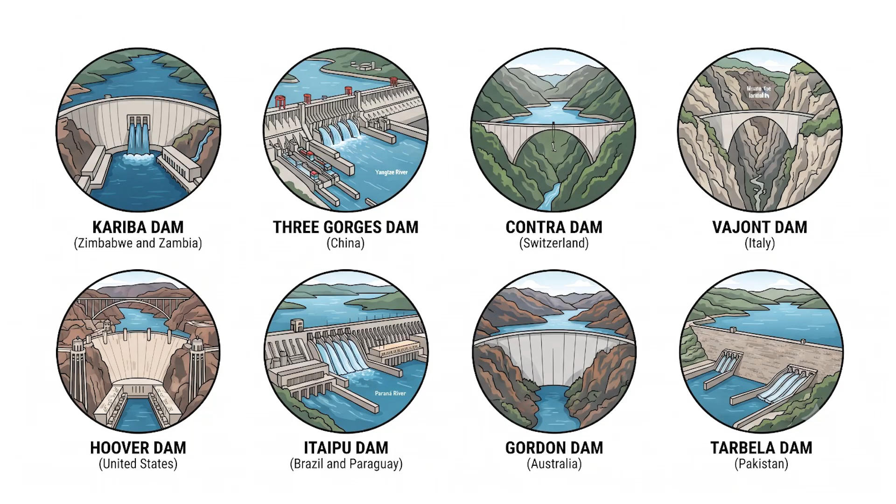The Kariba Dam, Zimbabwe and Zambia. The Kariba Dam sits on the Zambezi River on the border between Zimbabwe and Zambia and created what was, at the time of its completion in 1959, the largest artificial lake by volume anywhere on Earth.

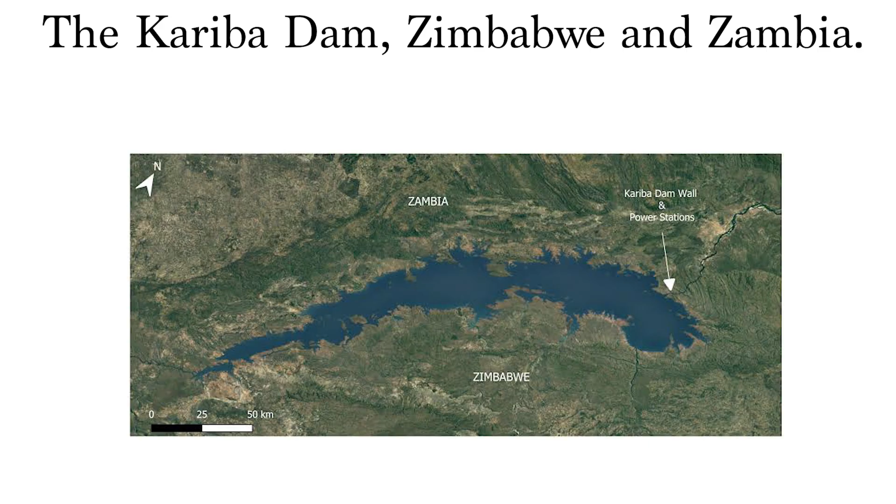A body of water so vast that it took years to fill completely and permanently altered the regional climate, rainfall patterns, and ecosystem of an enormous stretch of Central Africa.

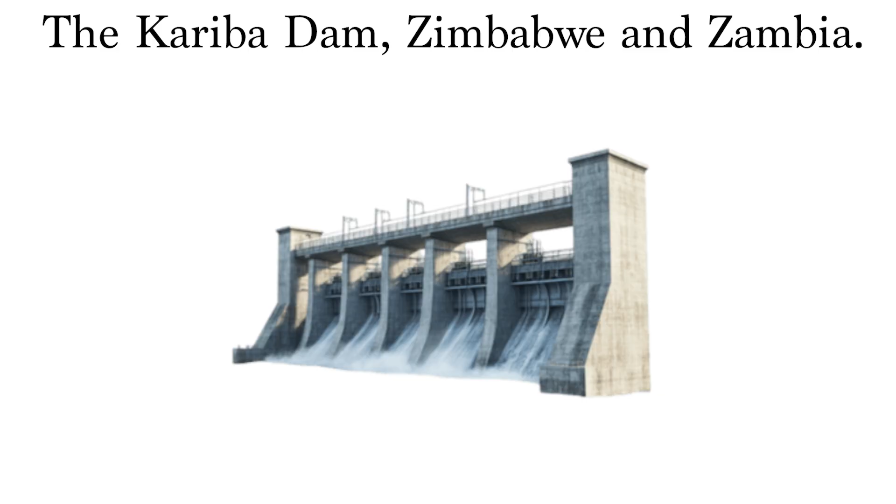The dam itself is an arch dam, meaning it uses the curved shape of its structure to transfer the enormous pressure of the water behind it into the walls of the gorge rather than relying entirely on the mass of the structure itself. A design choice that allows it to be relatively slender compared to the force it holds back.

What makes Kariba genuinely strange rather than simply large is the combination of engineering ambition and human consequence that accompanied its construction. The flooding of the Kariba Gorge displaced tens of thousands of the Tonga people from land their communities had occupied for generations, relocating them to areas that proved far less capable of supporting the agricultural life they had previously sustained.

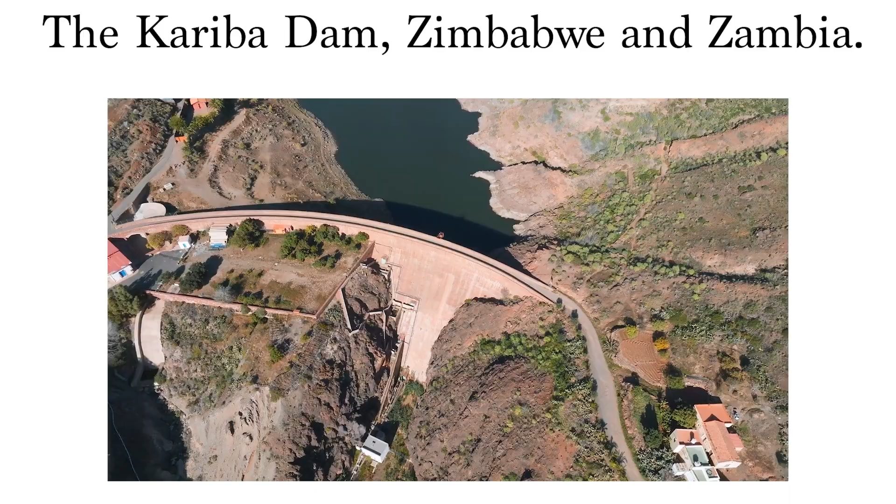The dam also sits on a geological fault line that has produced thousands of small earthquakes since the reservoir filled, a phenomenon known as reservoir-induced seismicity that Kariba helped bring to scientific attention as one of the earliest and most studied examples of a large reservoir changing the seismic behavior of the crust beneath it.

Engineers have identified structural concerns about the dam's plunge pool. The area at the base where water discharged through the spillways has eroded the rock over decades, raising questions about long-term stability that have made Kariba one of the most discussed cases in dam safety literature globally.

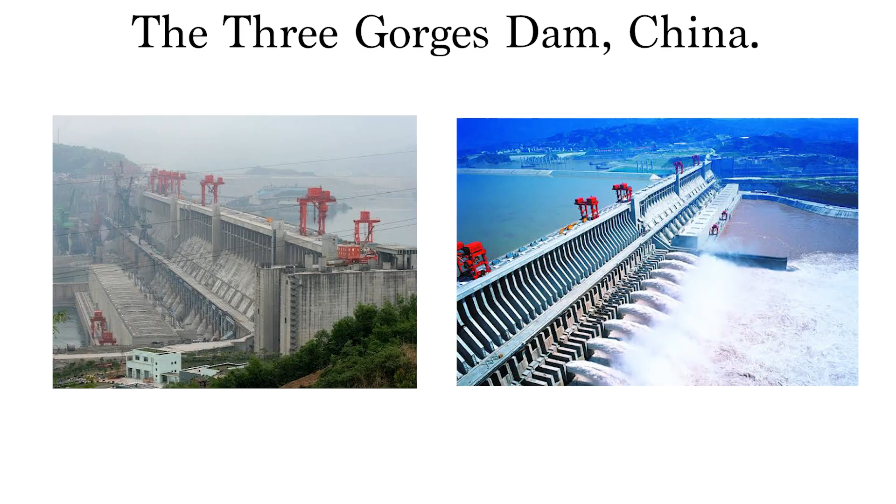The Three Gorges Dam, China. The Three Gorges Dam on the Yangtze River in China is the largest hydroelectric power station ever built by total generating capacity, a structure so massive in its physical dimensions and so significant in its consequences that it shifted the distribution of the Earth's mass.

Enough to measurably slow the planet's rotation by a fraction of a microsecond. An effect so small it has no practical consequence, but so conceptually striking that it regularly appears in discussions of what human engineering has become capable of achieving.

The reservoir created behind it stretches for over 600 kilometers upstream, and filling it required the relocation of more than 1 million people from towns, villages, and cities that were submerged as the water rose, one of the largest forced relocations associated with a single infrastructure project in recorded history.

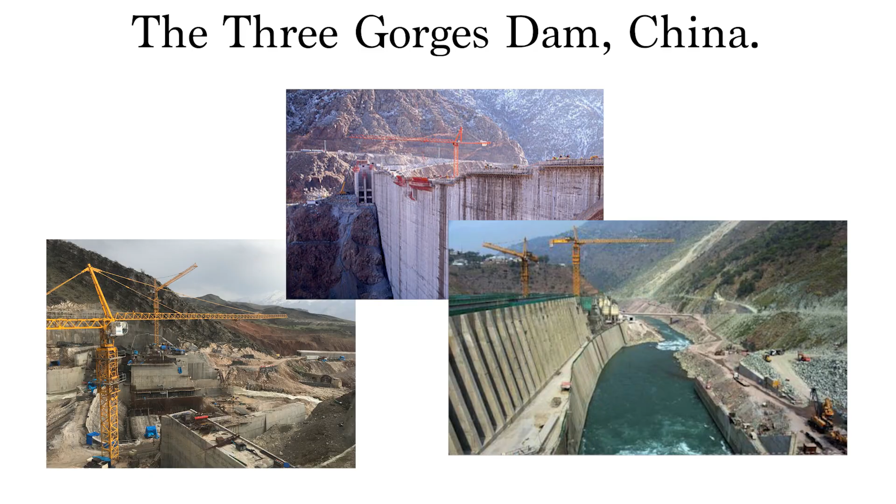What makes Three Gorges genuinely strange beyond its scale is the range of unintended consequences its construction produced. The reduced sediment flow downstream changed the character of the river and affected agricultural land that had relied on annual flooding to replenish its fertility.

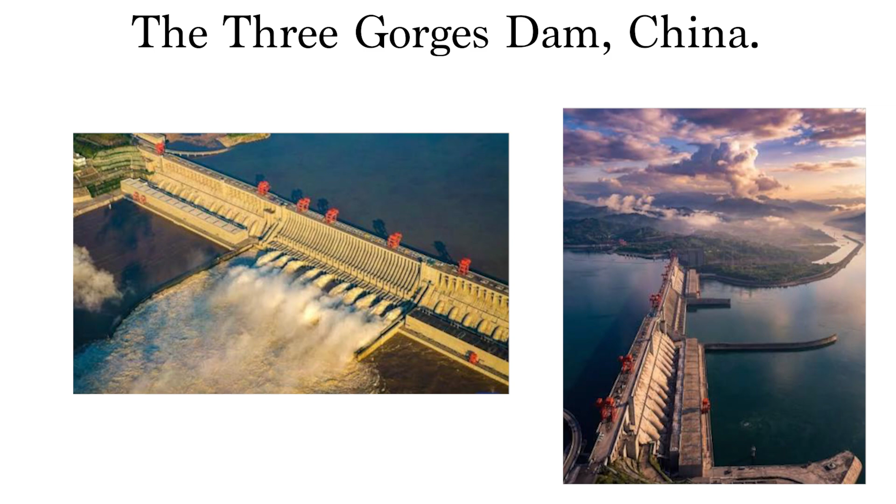The weight of the reservoir water is believed to have influenced local seismic activity, and the submersion of an enormous stretch of the Yangtze River Valley permanently erased archaeological sites and cultural landscapes that had existed for thousands of years.

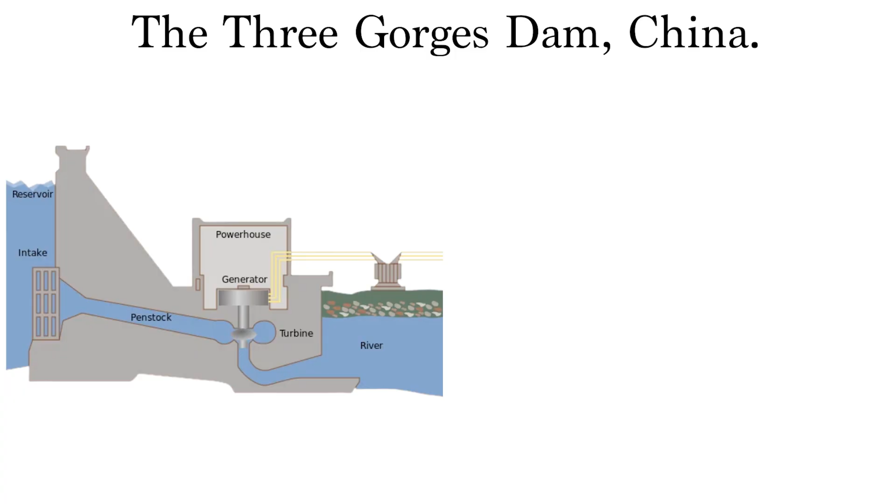The dam generates electricity for a significant portion of China's population, while simultaneously representing one of the most complete examples available of how a single engineering project can reshape the physical, ecological, and human geography of an entire region in ways that extend far beyond what any initial planning process fully anticipated.

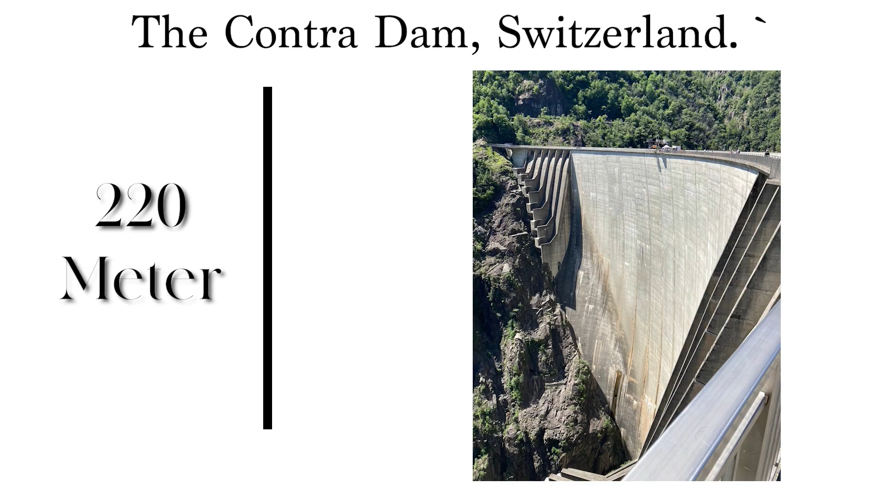The Contra Dam, Switzerland. The Contra Dam in the canton of Ticino in southern Switzerland is an arch dam that reaches a height of approximately 220 meters above the valley floor, making it one of the tallest dams in Europe, and it occupies a position in popular culture that most dams never achieve.

It appeared in a James Bond film, used as the location for a scene involving a bungee jump from the crest that became one of the most recognized opening sequences in the franchise's history.

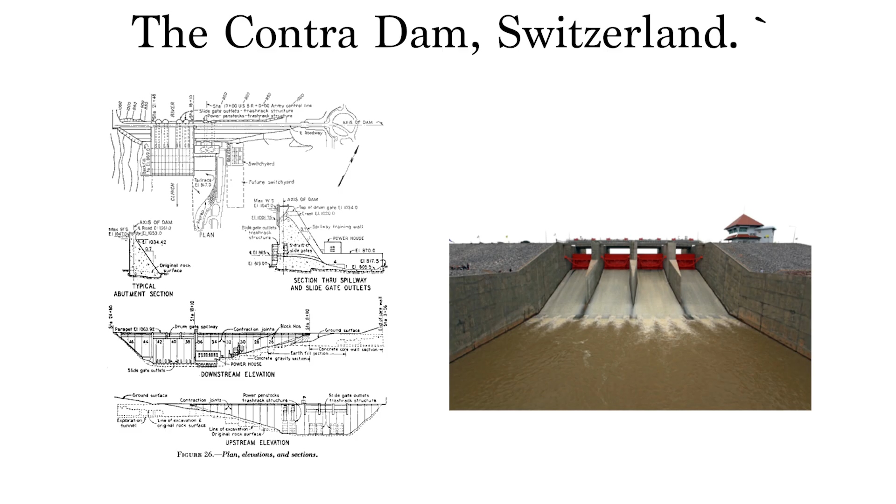The dam is a double curvature arch design, meaning it curves both horizontally and vertically to distribute the pressure of the water behind it into the surrounding rock with maximum efficiency. And the engineering elegance of that form is visible from the valley below in a way that makes the structure genuinely striking as an object independent of its function.

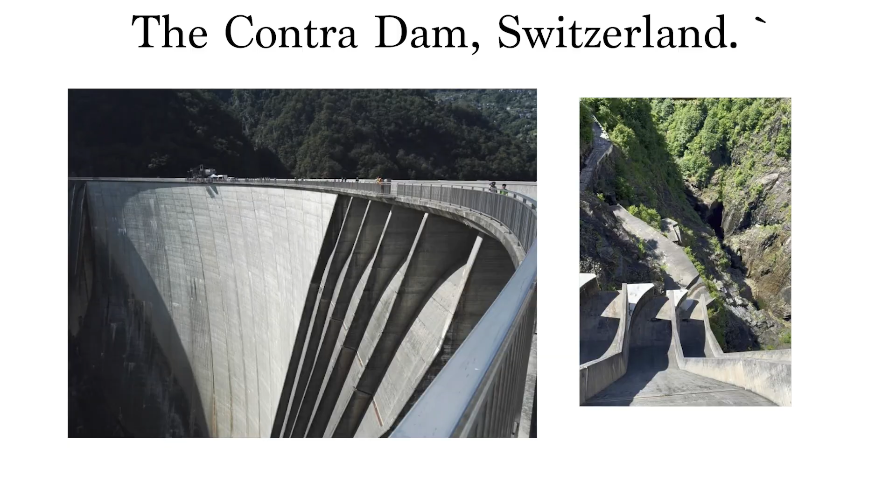What makes Contra genuinely unusual among large dams is the recreational use that has developed around its extreme height. The dam hosts regular bungee jumping operations from its crest, making it one of the highest bungee jumping locations in the world and one of the very few pieces of critical water infrastructure that doubles as an extreme sports venue.

The combination of a functioning dam holding back a significant reservoir and a commercial operation sending paying customers off its edge on elastic cords represents a specific juxtaposition of industrial seriousness and recreational spectacle that is genuinely difficult to find anywhere else in the world's infrastructure.

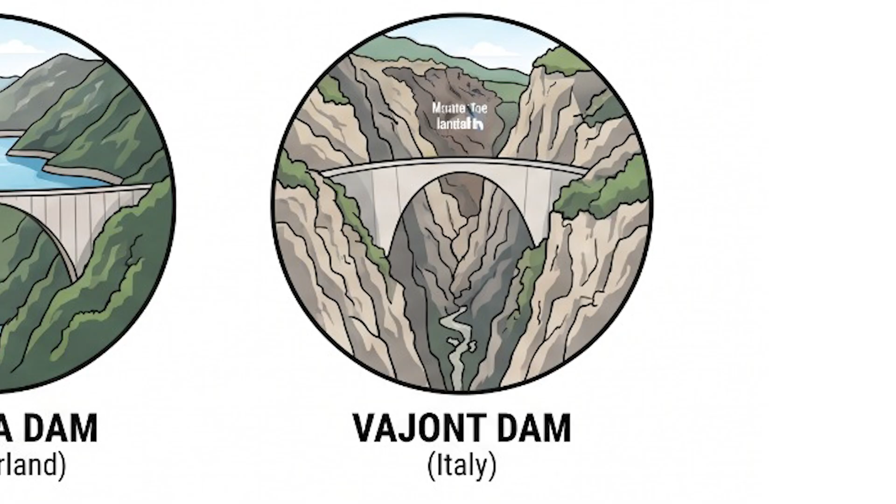The Vajont Dam, Italy. The Vajont Dam in northeastern Italy is not the strangest dam on this list because of what it was designed to do, but because of what happened to it in 1963. An event that removed it from the category of engineering achievement and placed it permanently in the category of catastrophic failure, despite the dam itself never actually breaking.

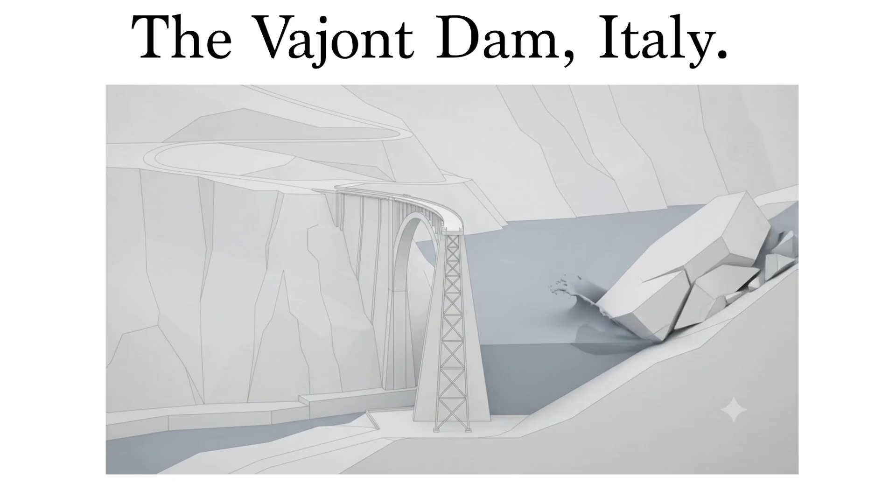The structure, a thin arch dam that was among the tallest in the world at the time of its completion, remained structurally intact throughout the disaster that made it notorious. What failed was not the concrete but the understanding of the geology surrounding the reservoir.

A massive section of Monte Toc, the mountain overlooking the reservoir, had been showing signs of instability since the reservoir began filling, and on the night of October 9, 1963, approximately 270 million cubic meters of rock and earth slid into the reservoir at speed, displacing the water in a wave that overtopped the dam by approximately 250 meters and destroyed the town of Longarone and several surrounding villages in the valley below, killing nearly 2,000 people.

The dam still stands, holding back an empty reservoir in a valley that was never rebuilt or reoccupied in the same way. A functioning structure presiding over a permanently altered landscape, where the consequences of what was not understood about the surrounding geology remain visible in the shape of the hillside that moved and the absence of the community that the wave erased. The Hoover Dam, United States.

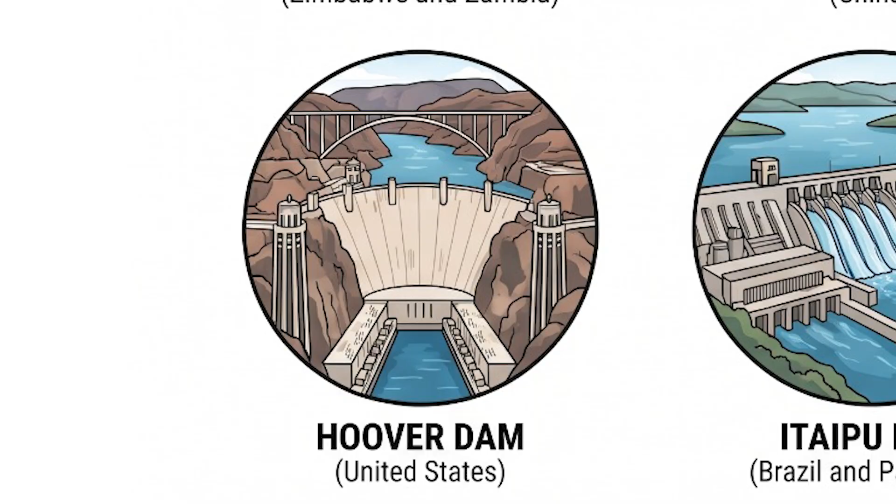The Hoover Dam on the Colorado River between Nevada and Arizona was completed in 1936 during the Great Depression, and represented at the time the largest concrete structure ever built. An achievement accomplished under extraordinary pressure, both the political pressure of a government desperate to demonstrate that large-scale public works could transform the economy, and the physical pressure of a river whose management had defined the development of the American Southwest for decades.

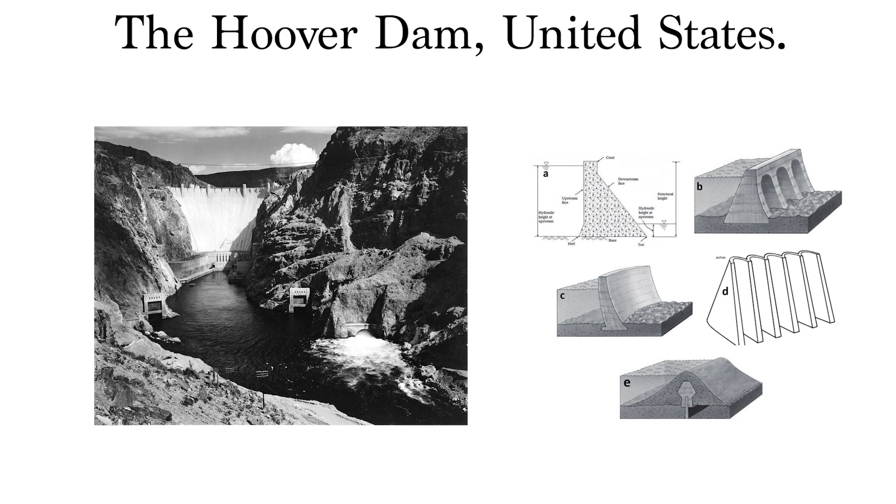The dam is an arch-gravity design, using both its curved shape and its sheer mass to resist the pressure of Lake Mead behind it. The geometry of the structure, combined with the Art Deco styling applied to its visible surfaces, gives it a visual character unusual among large dams, which tend toward a purely functional appearance.

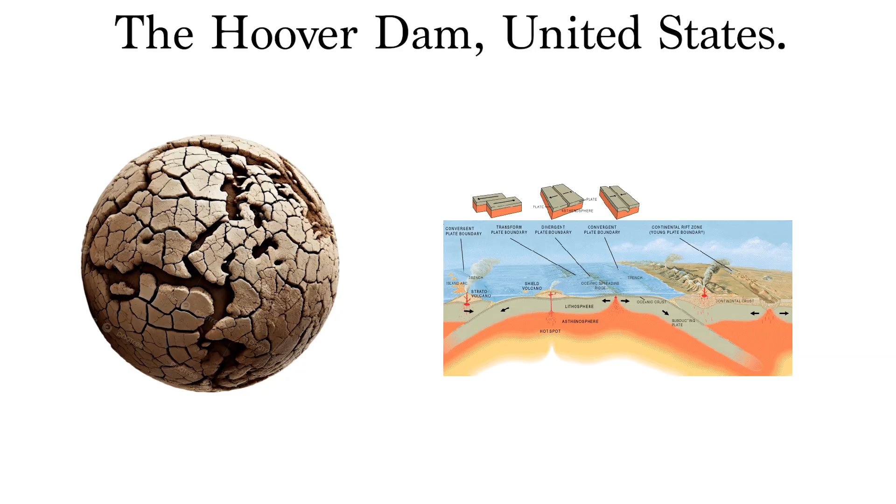What makes Hoover genuinely strange is the relationship it has developed with the ground beneath it. The weight of the water in Lake Mead has depressed the Earth's crust in the surrounding area by measurable amounts, and the fluctuation of the lake level as the reservoir fills and empties with drought and precipitation cycles produces ongoing changes in that depression, making the geology beneath one of America's most visited landmarks a living record of water availability across decades.

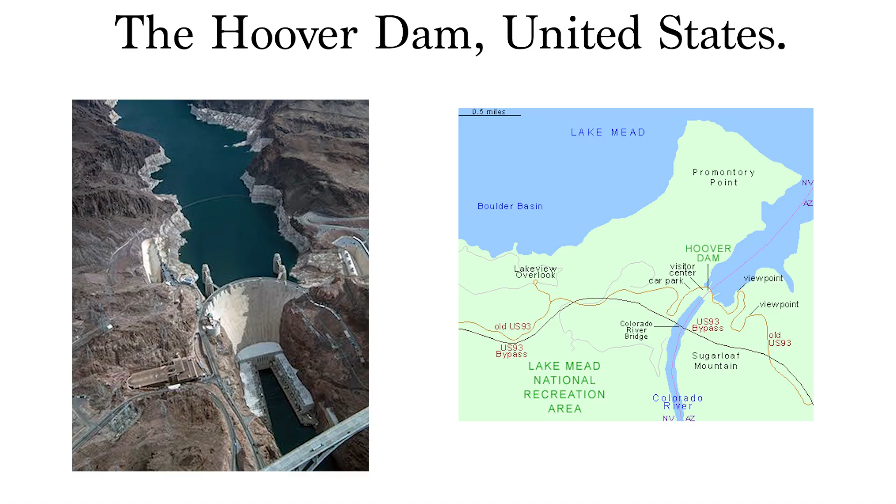The dam also sits in a seismically active region, and the reservoir has been associated with increased local earthquake frequency, placing it alongside Kariba as an early and well-documented example of the seismic consequences that large reservoirs can produce in susceptible geological settings.

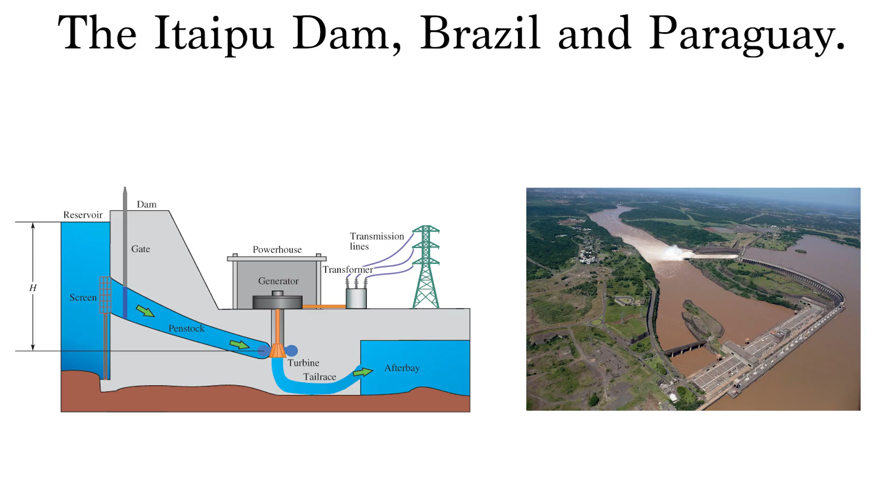The Itaipu Dam, Brazil and Paraguay. The Itaipu Dam on the Parana River on the border between Brazil and Paraguay held the record for the world's largest hydroelectric power station by annual energy generation, for a period that lasted until Three Gorges surpassed it.

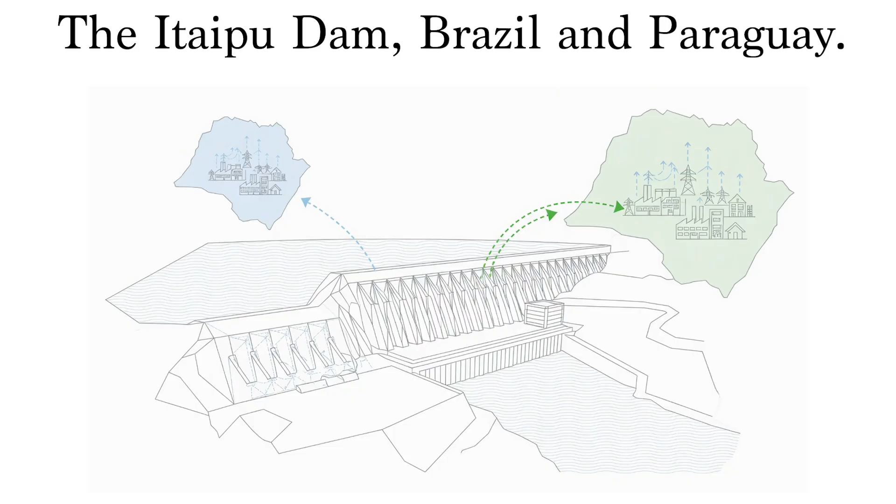It remains significant not only for its generating capacity, but for the political and logistical complexity of building and operating a major piece of infrastructure that belongs jointly to two sovereign nations with different languages, different electrical systems, and different energy needs. The dam supplies a remarkable proportion of Paraguay's entire electricity consumption, while simultaneously providing a significant share of Brazil's, meaning a single structure on a single river simultaneously defines the energy economy of one country and makes a major contribution to the energy economy of a country many times larger.

What makes Itaipu strange in a structural sense is the variety of dam types used in its construction. The main dam combines different structural approaches across its length, including hollow gravity sections, buttress sections, and earthfill embankments, creating what is effectively several different types of dam joined together into a single continuous structure rather than one uniform design.

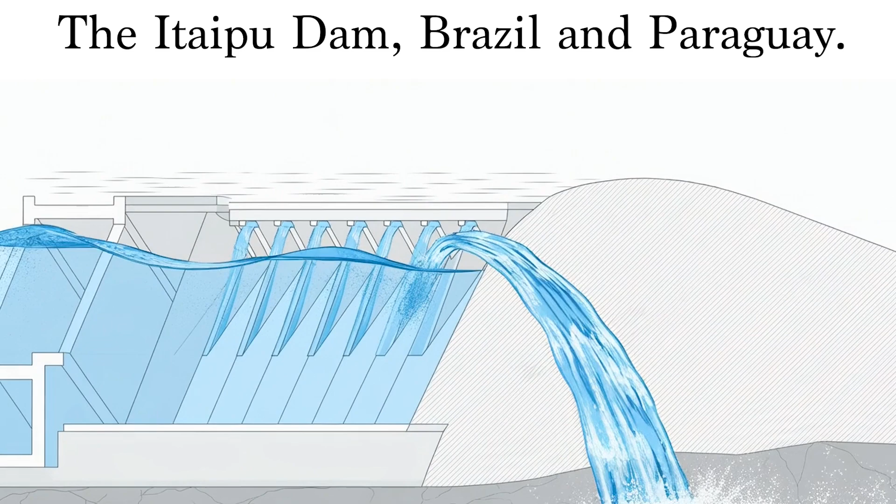Applied across the full width of the river, the construction required diverting the Parana River, one of the largest rivers in South America, through a channel cut specifically for that purpose, a preliminary engineering project that was itself comparable in scale to many of the largest infrastructure projects built independently elsewhere in the world. The Gordon Dam, Australia.

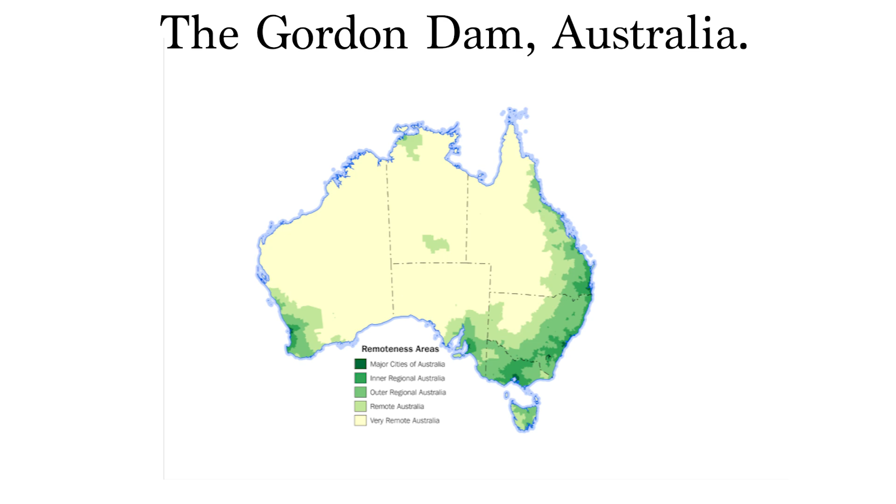The Gordon Dam in the wilderness of southwestern Tasmania in Australia is a double curvature arch dam that holds back Lake Gordon, the largest reservoir in Australia by volume, in a region so remote and so environmentally significant that its construction in the 1970s triggered one of the earliest and most consequential environmental campaigns, a campaign that galvanized public opinion around wilderness preservation in a way that transformed Australian environmental politics.

The Gordon Dam therefore exists simultaneously as a functioning piece of infrastructure and as the event that created the conditions for its own sequel to be stopped, making it one of the few dams in the world whose most significant consequence was a dam that was never built.

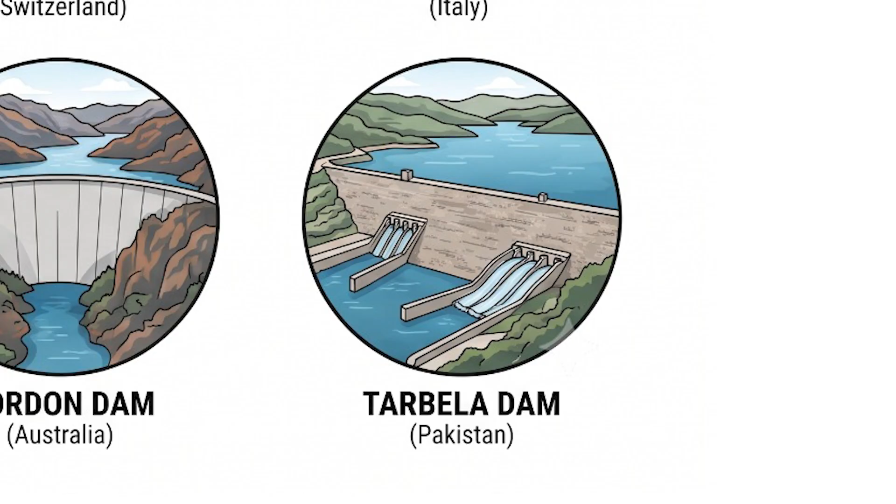The Tarbela Dam, Pakistan. The Tarbela Dam on the Indus River in Pakistan is the largest earth-filled dam in the world by the volume of material used in its construction, a structure built not from concrete but from compacted earth and rock fill, on a scale that required moving more material than any other dam project in history up to the point of its completion in 1976.

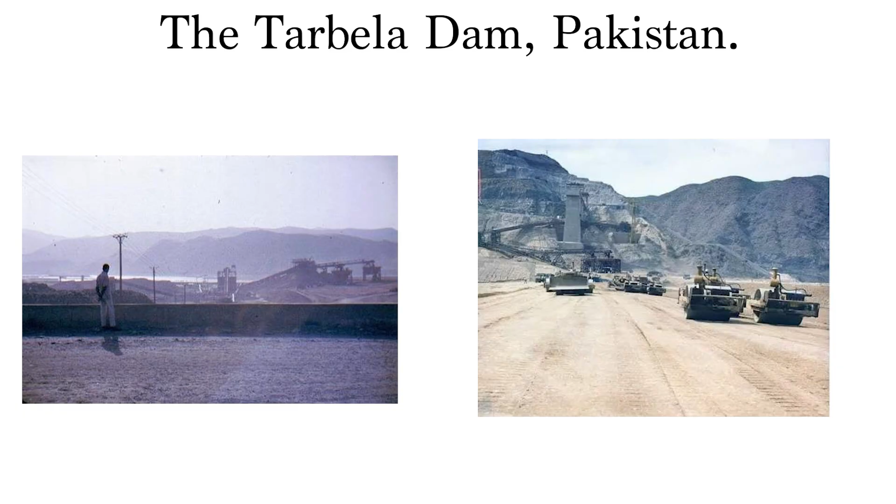The dam holds back the Tarbela Reservoir in the Khyber Pakhtunkhwa region, serving the dual purpose of hydroelectric generation and irrigation water supply for agricultural land downstream that depends on the controlled release of Indus water for its productivity.

What makes Tarbela genuinely strange among large dams is the problem that has defined its operational life since the reservoir first filled. The Indus carries one of the highest sediment loads of any major river in the world, and that sediment has been accumulating in the reservoir at a rate that has progressively reduced its storage capacity over the decades since completion, turning the long-term management of sediment accumulation into one of the central engineering challenges of keeping the dam functional.

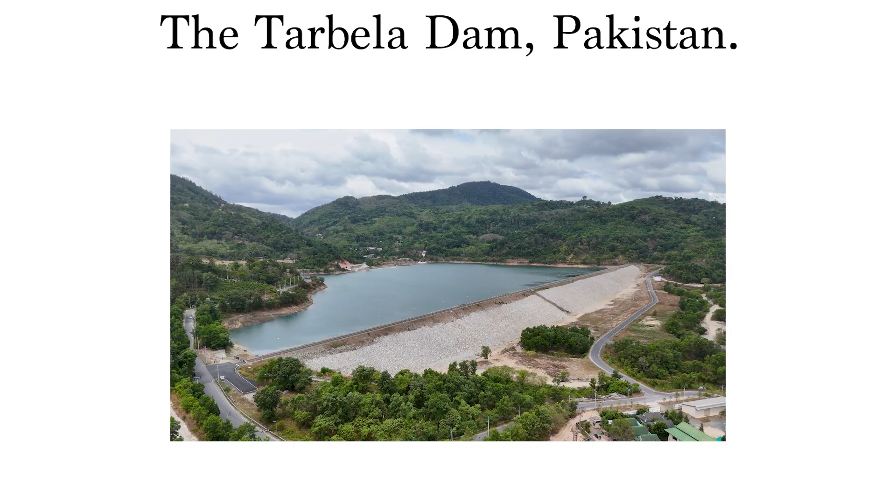The structure that was built to last has been in a continuous race against the river it impounds, with the sediment carried by that river slowly and consistently working to undo the storage capacity that the dam was built to create, making Tarbela a living example of how the natural behavior of a river system does not simply pause when a dam is placed across it, but continues operating according to its own logic within whatever new configuration human engineering imposes.